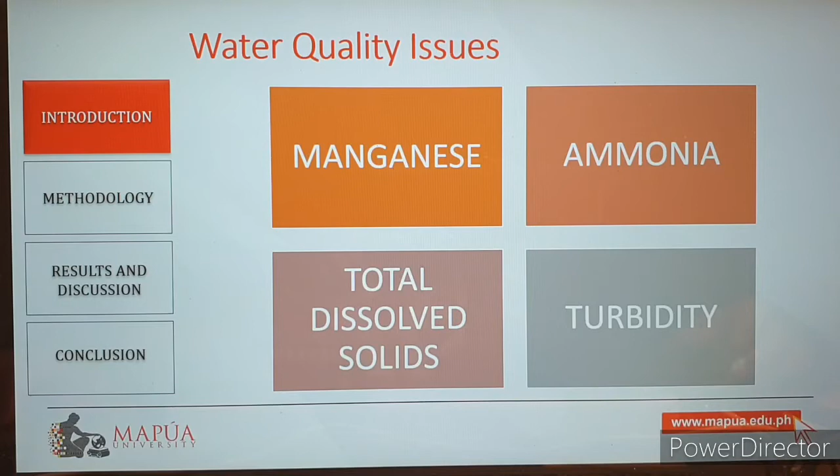The main pollutants in the lake are as follows: ammonia, manganese, total dissolved solids, and turbidity.

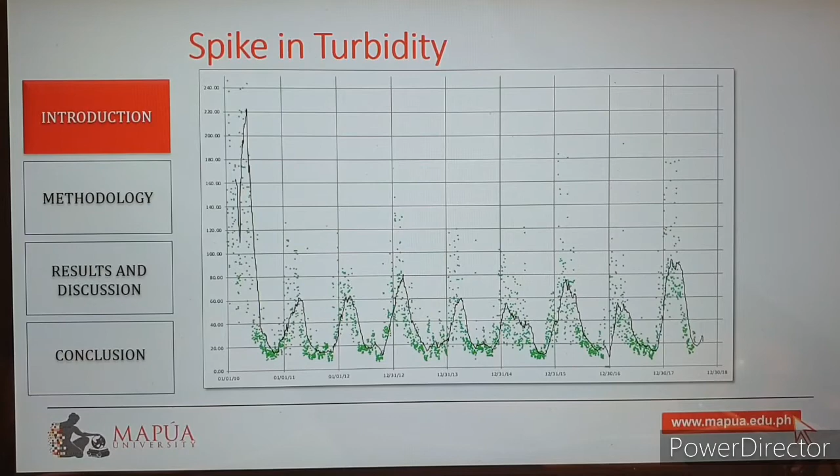The raw water from the source is subjected to rapid mixing, where coagulant is dosed. Coagulation process will start upon contact of the coagulant to the raw water. It will then pass through a tank where flocculant is added with slower mixing. Coagulated solids will form larger aggregates.

The raw water and the solids will enter the reaction zone where saturated air is dosed into the system, making the aggregate solids float. They are then separated from the water by scraping, and the sludge is collected for treatment and disposal. A portion of the treated water is recycled back to the saturation zone, where air bubbles are formed through high pressure in the saturation tank. This creates an air-water system that is used in the flotation of sludge in the reaction zone.

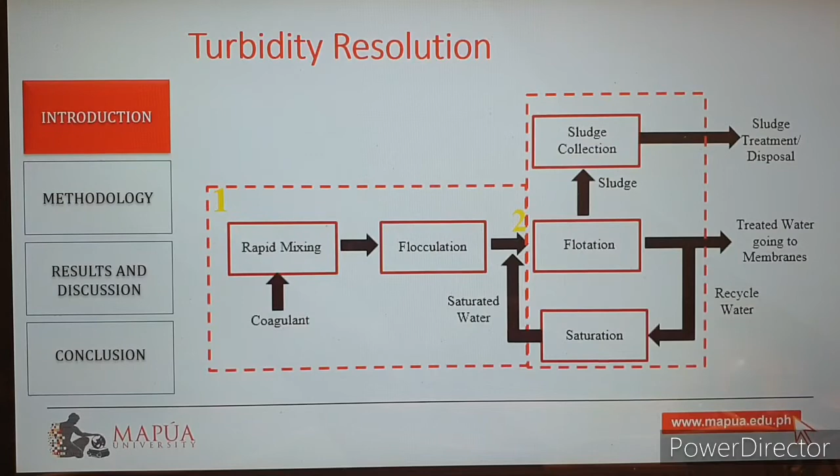Previous studies that determined the efficiency of DAF to treat high turbidity waters used pilot plants and experimental setups instead of full-scale plants. This has a significant difference, as actual setups tend to have significantly lower efficiency due to turbulence and higher flow rate.

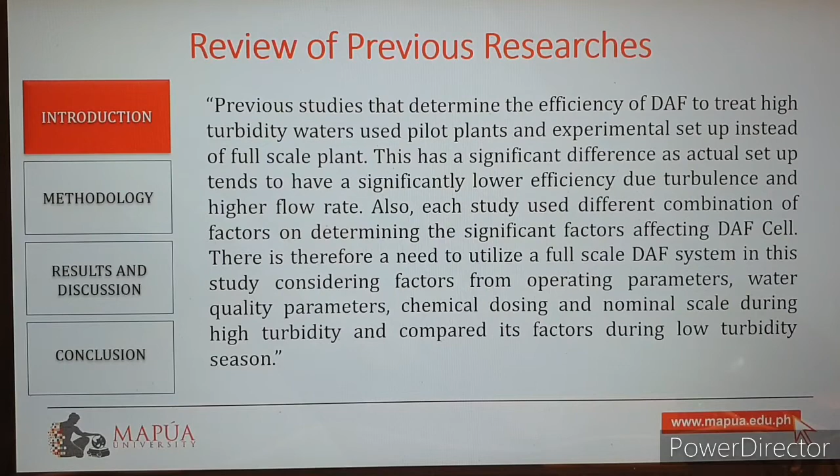Also, each study used a different combination of factors in determining the significant factors affecting DAF. There is therefore a need to utilize a full-scale DAF system in this study, considering factors from operating parameters, water quality parameters, chemical dosing and nominal scale, and to compare these factors during the low turbidity season.

The first objective of the study is to formulate an optimization model of the dissolved air flotation performance for different turbidity conditions. Second is to test the model on actual conditions to determine its effectiveness for different turbidity conditions.

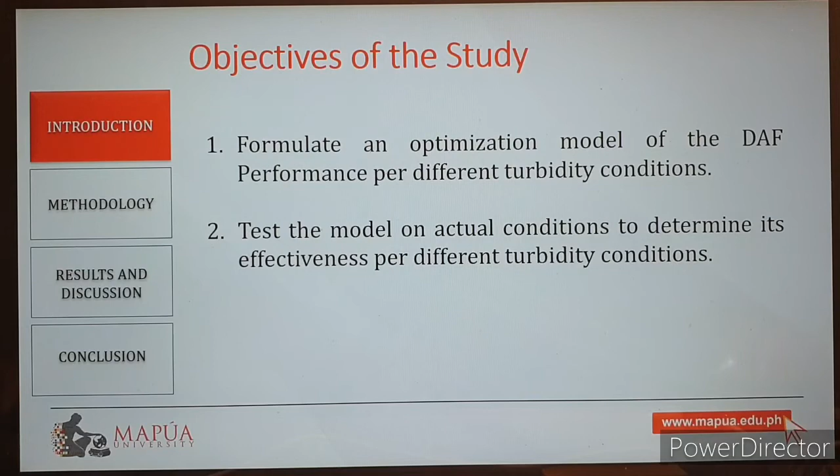For the significance of the study, it can be used as a benchmark for other water and wastewater treatment plants that use a dissolved air flotation system.

The study focused on the existing dissolved air flotation system of Putatan water treatment plant. The study was limited to the records and forms available from the plant, and was performed prior to and during the Amihan season, where turbidity values shot up.

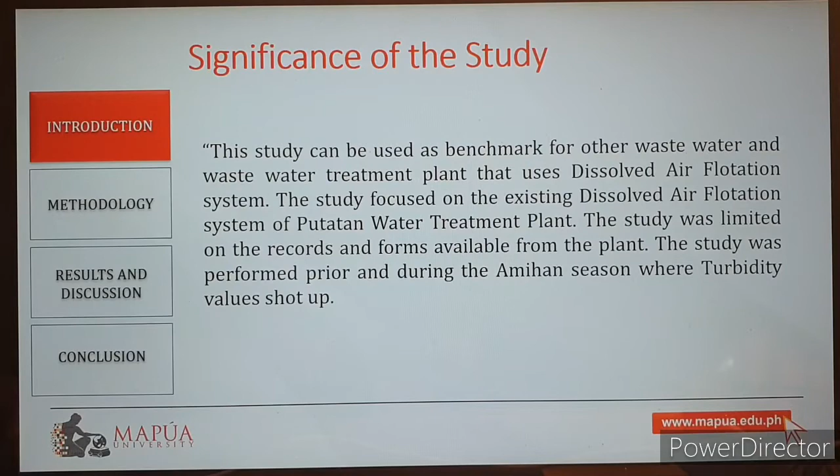In order to optimize a full-scale dissolved air flotation system, several items were prepared prior to the experimental runs. First, the scope of low and high turbidity was defined. Second, the factors that have a significant impact on dissolved air flotation at different turbidity levels were identified.

This was done by performing cluster analysis and multiple regressions on the historical data. Cluster analysis was used to group the historical data into different conditions of turbidity, high and low. It is a method of grouping objects that are very similar, not only in one, but in several variables.

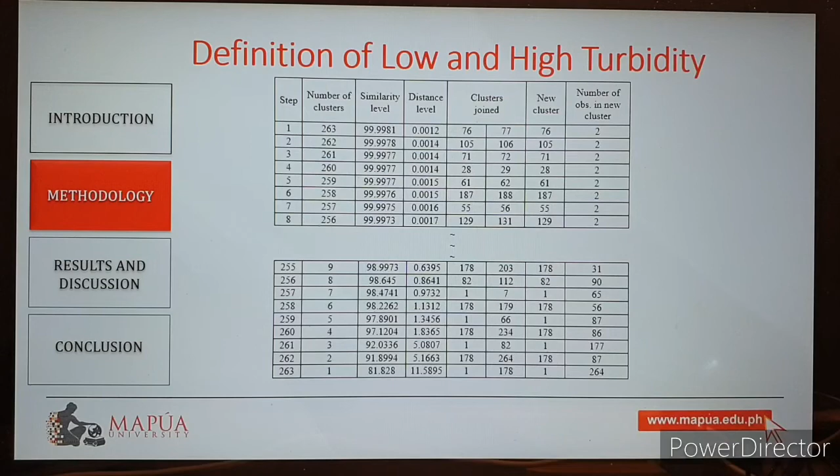Squared Euclidean distance was used as the distance matrix, and the method was complete linkage. The jump in similarity level from steps 262 to 263 was the biggest among the steps, at 10.071%, and therefore it was chosen as the number of clusters, which is two clusters.

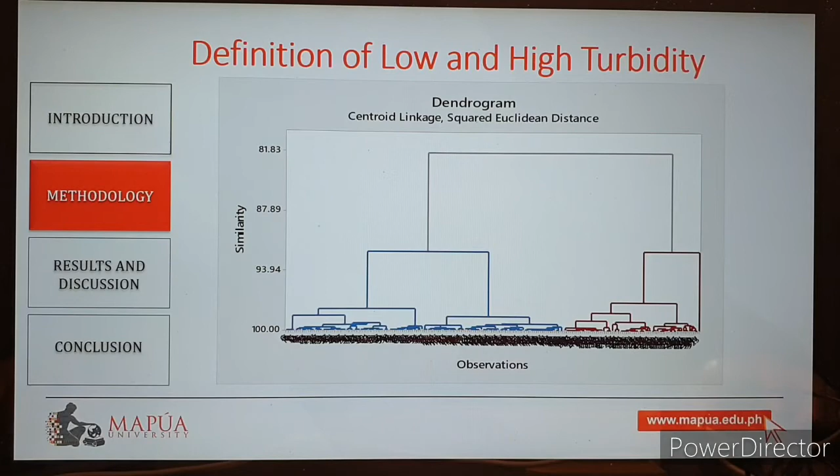There was no literature showing the distinct differences between low and high turbidity values. However, several literature suggested that around 200 NTU turbidity was already considered high. Therefore, the 181 NTU lower limit for the high turbidity cluster was accepted. This definition of low and high turbidity was used for the rest of the experiment.

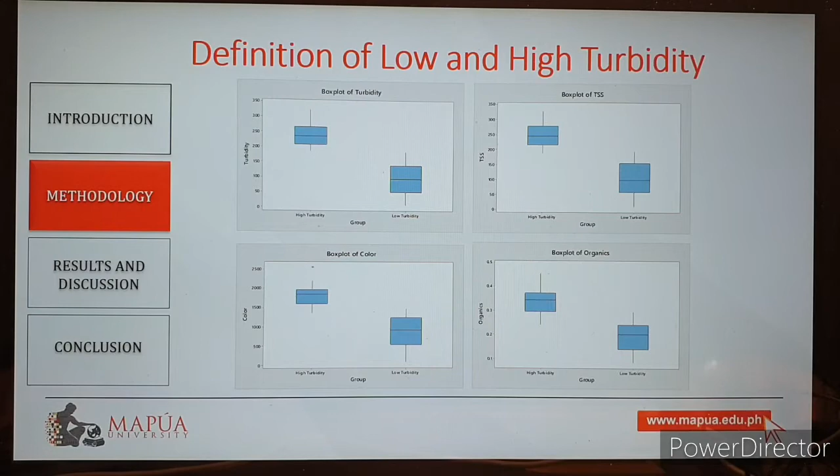Upon identification of the limits of turbidity level, multiple regression was performed for both clusters to determine the significant parameters. As mentioned in the previous chapter, previous studies showed that parameters used to optimize dissolved air flotation cells vary from study to study. Some use water quality and chemical dosing, like what Alshani et al. did using oil-water emulsion. Some focus on operating parameters of dissolved air flotation, such as what Rubio et al. mentioned. Others combined water quality, chemical dosing, and operating parameters, such as Maysami and Caselan, Edwards et al., Palaniandi et al., and Bickerton stated. To account for the effect of various factors, inlet water quality factors, chemical dosing factors, and dissolved air flotation operating parameter factors were included in a multiple regression.

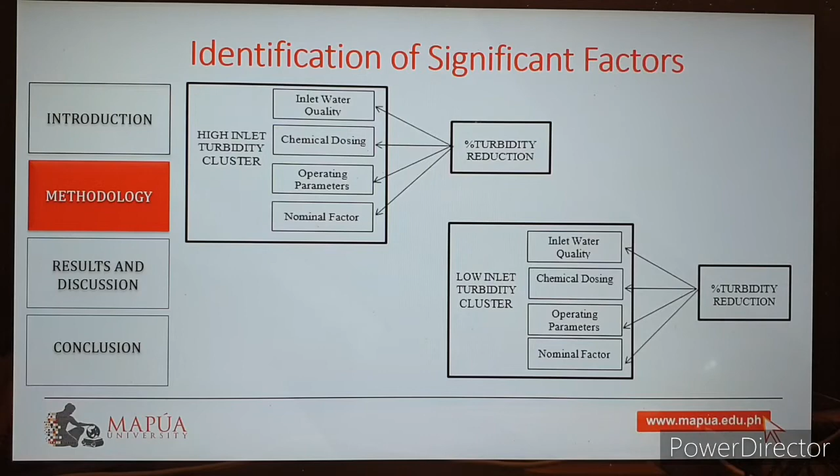To account for the difference in human behavior during morning shift and night shift, a nominal factor, which was time per shift, was added in the regression.

Aside from turbidity, there are 11 inlet water quality parameters included. First is the oxidation reduction potential, the potential that an oxidation and reduction reaction occurs. The level of oxidation reduction potential will define what form of chemicals exist in the raw water.

Second is the total dissolved solid. It's a measure of the dissolved combined content of all substances present in the water that are smaller than 0.45 microns in molecular or ionic form.

Third, salinity, a measure of the amount of salts present in the raw water. Fourth, conductivity, the ability of the raw water to conduct an electrical current with the dissolved ions as the conductors. Fifth, in contrast with total dissolved solids, this is the measure of the solids present in the water that cannot pass through the 0.45 microns.

Sixth, ammonia, usually in the form of ammonia nitrogen, exists in water via natural liquefaction, domestic and industrial effluents, and sludge discharge. It produces taste and color issues in the water and reduces dissolved oxygen in the aquatic system.

Seventh, manganese also exists in water via natural liquefaction, domestic and industrial effluents, and sludge discharge. It produces discoloration, metallic taste, and odor in the product water, and clogging in pipes.

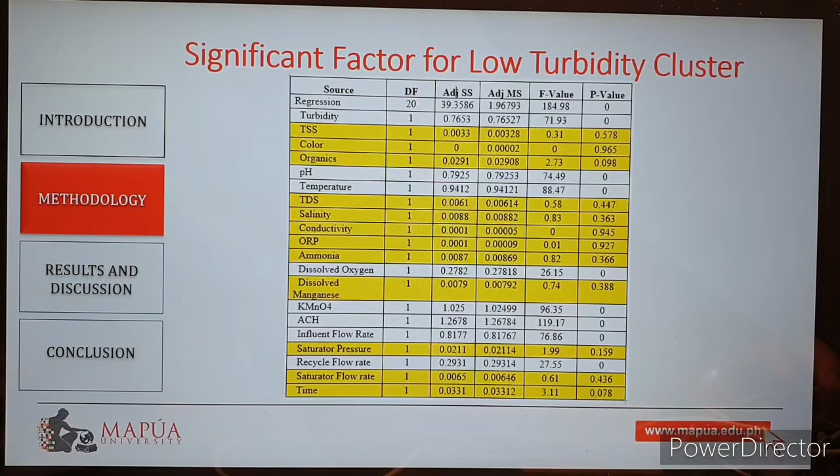After removing these parameters, the second multiple regression was executed. The ANOVA is as follows. From table 3, all the parameters were shown to have p-values lower than 0.05. Therefore, for the factorial experiment on the low turbidity cluster, 8 parameters were used: turbidity, influent flow rate, pH, temperature, dissolved oxygen, potassium permanganate dosing, ACH dosing, and recycled flow rate.

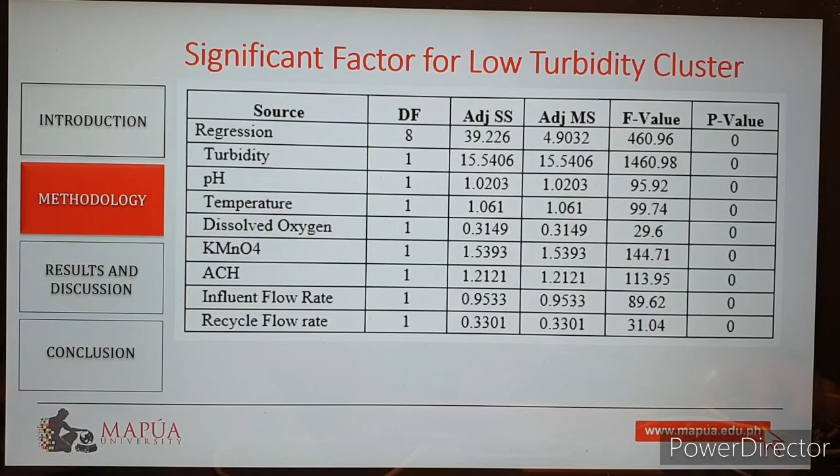For the high turbidity cluster, below is the ANOVA from the initial run. From table 4, the p-value for turbidity is equal to 0.661. TSS is equal to 0.988. Color p-value is 0.756. Organics p-value is 0.992. pH p-value is 0.136. Temperature p-value is 0.244. Salinity p-value is 0.584. Conductivity p-value is 0.61. ORP p-value is 0.499. Ammonia p-value is 0.598. Dissolved oxygen is 0.354, potassium permanganate is 0.338, ACH is 0.937, saturator pressure is 0.439, and recycled flow rate is 0.863. Saturator flow rate is 0.295, and time is 0.367 were all larger than 0.05.

This means that their effects had no significant effect on percent turbidity reduction. These variables will therefore be removed in running the design of experiment.

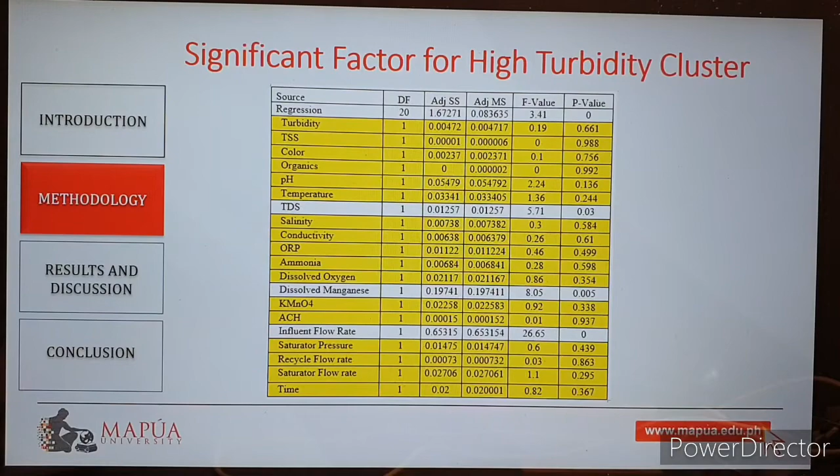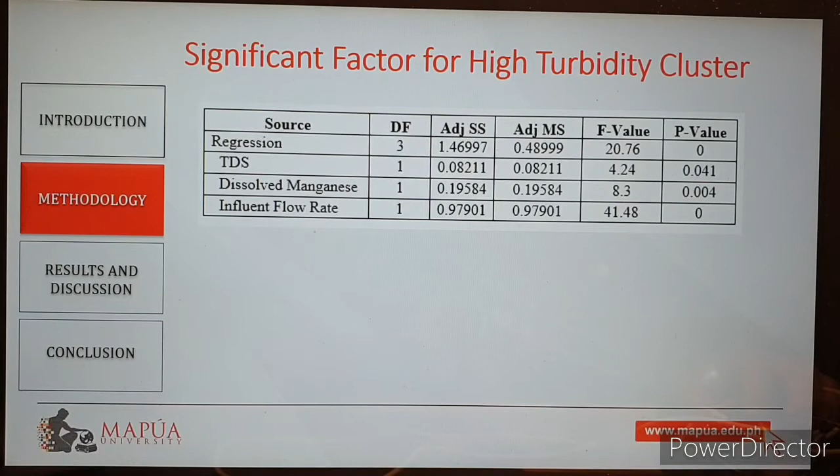Upon removing these parameters, another round of regression was performed. The ANOVA is as follows. ANOVA table for the stepwise multiple regression of the turbidity cluster. From table 5, all of the parameters are shown to have p-values lower than 0.05. Therefore, for the factorial experiment on the high turbidity cluster, 3 parameters were used: total dissolved solid, dissolved manganese, and influent flow rate.

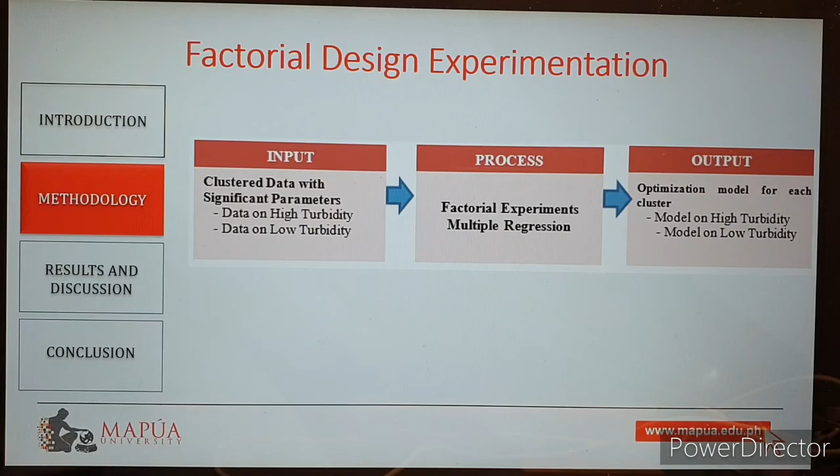Upon establishing the factors that will be used for optimization for both clusters, the objective of this paper can now be achieved by performing factorial design experimentation on each cluster and by verifying the accuracy of the model.

For the low turbidity cluster with 8 factors, a fractional factorial design is used with 1 replicate for each treatment. First, there is only limited time for the runs, and second, there are some factors that are not controlled but we have to wait for them to happen, like inlet water quality parameters. Resolution IV was chosen, 1 out of 8 fraction with 32 runs.

The values of the factors are shown based on the lowest and the highest recorded values of each of the factors in the low turbidity cluster. The experiment was performed from December 1, 2018 to January 3, 2019. The experiment was done in the actual DAF cell, and measurements were done in the lab for the water quality, and checking the flow meter for the flow rates. The results were encoded in Minitab for multiple regression.

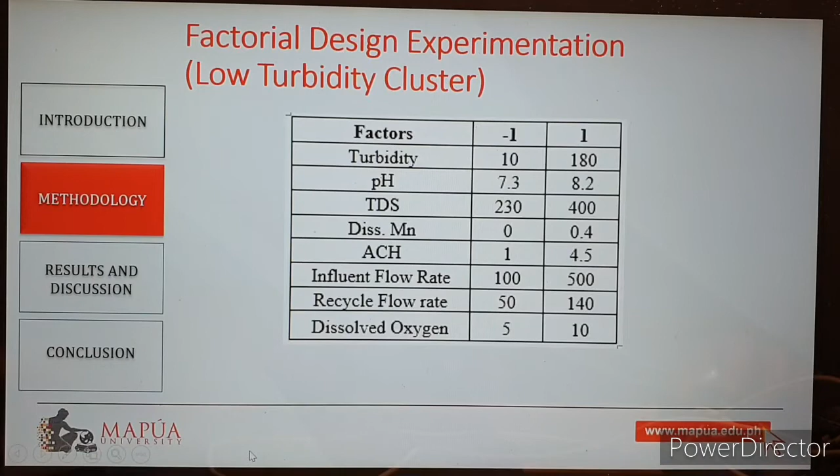For the high turbidity cluster with three factors, a full factorial design was used with one replicate for each treatment, as there is only limited time for the runs. There are some factors that are not controlled, but we have to wait for them to happen. It was chosen with 8 runs. The experiment was performed from December 1, 2018 to January 1, 2019. The experiment was done in the actual DAF cell, and measurements were done in the lab for the water quality and checking the flow meter for the flow rates. The results were then included in Minitab for multiple regression.

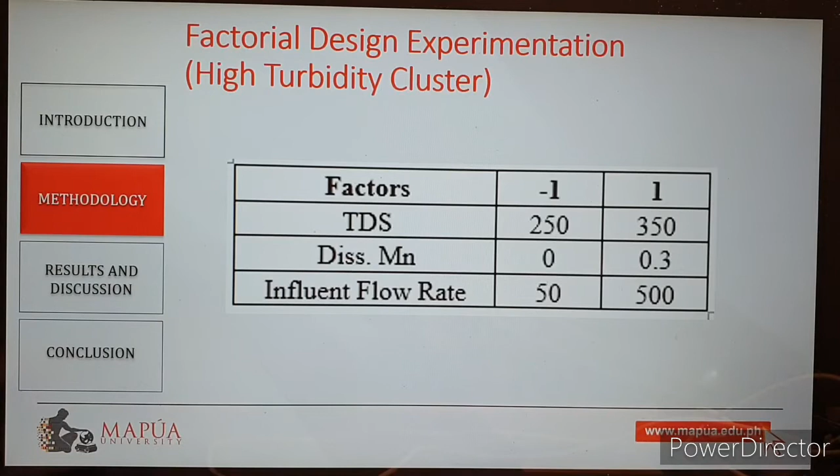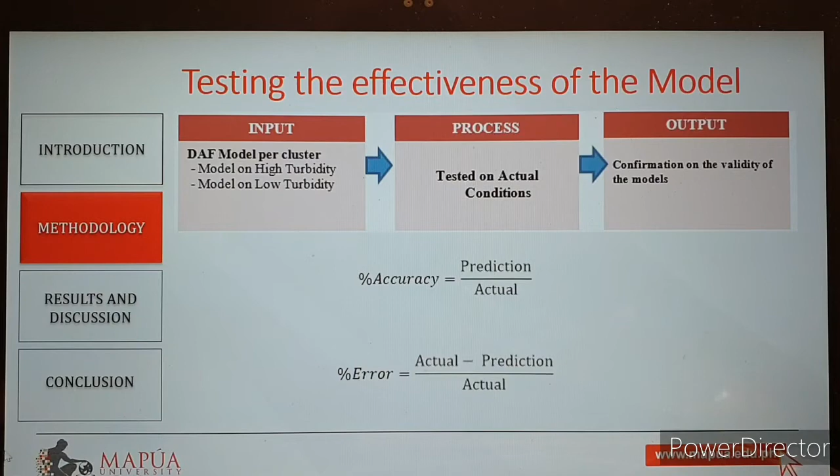It was apparent that 11 factors, including interactions, had significant effect on the percent turbidity reduction of the low turbidity cluster.

The factors considered include ACH influent flow rate, total dissolved solids, dissolved oxygen, turbidity, pH, recycle flow rate, dissolved manganese, and their interactions such as ACH and dissolved oxygen, and dissolved oxygen and turbidity.

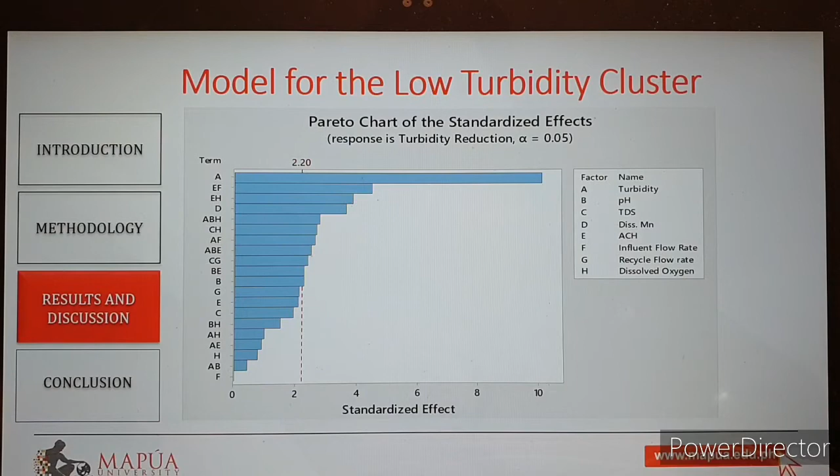For a confidence level of 95%, 11 factors were significant. Here is the ANOVA table calculated from the experiment. The items highlighted in yellow were the factors that have p-value greater than 0.05, meaning that at 95% confidence level, they had no significant effect on the percent turbidity reduction at the low turbidity cluster. It must be noted, however, that since the model was hierarchical, the values must be retained.

The top four factors, turbidity at 46.08%, ACH influent flow rate at 9.08%, ACH-dissolved oxygen interaction at 6.71%, and dissolved manganese at 5.98%, constitute 68.09% contribution to the percent turbidity reduction. At low turbidity, percent turbidity reduction was more sensitive to changes in turbidity.

Given the equation of turbidity reduction, and since the final turbidity was the same, increasing the initial turbidity would increase the total percent turbidity reduction.

The relationship of ACH and influent with regards to turbidity reduction reflects the effectiveness of coagulation through rapid mixing. ACH was injected into the influent, and coagulation was induced through the high flow rate of the influent. A good combination of flow and chemical dosing would lead to improvement in turbidity reduction.

The relationship of ACH and dissolved oxygen with regards to turbidity reduction reflects the effectiveness of coagulation and aeration. High dissolved oxygen in the system would mean that the coagulated particles can be easily floated in the tank.

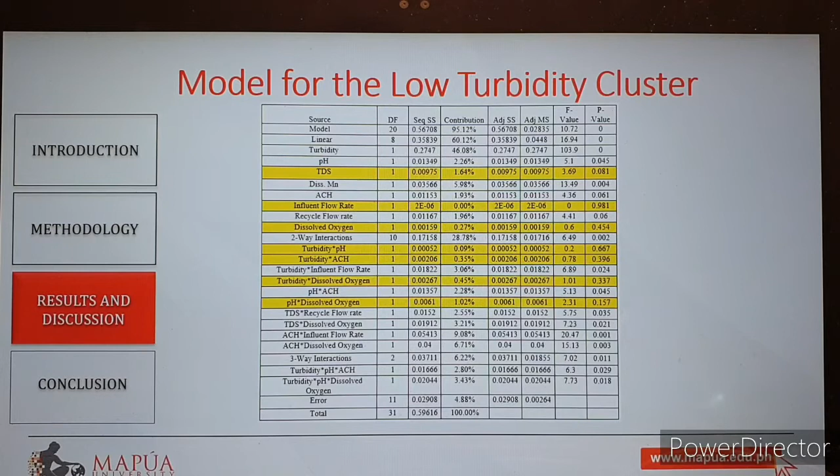The effect of dissolved manganese with regards to turbidity reduction was on the formation of manganese dioxide. High dissolved manganese results in color and adds to the turbidity of the system.

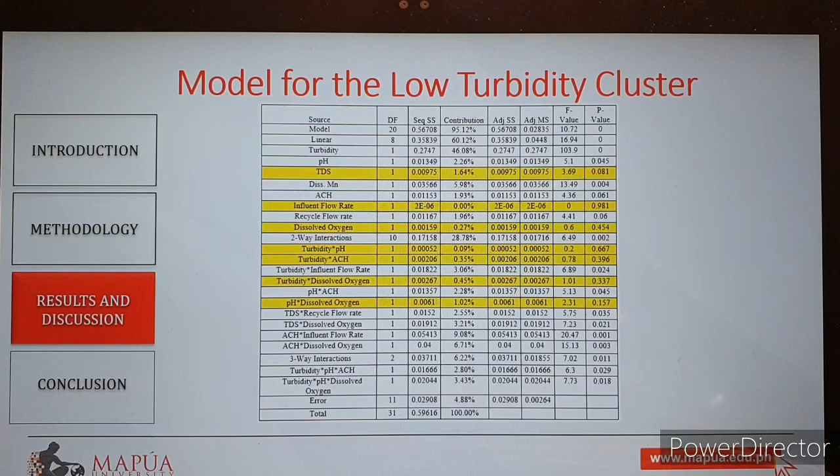Based on the results of the coefficients in the table above, R squared equals 95.12%, which means there are smaller differences between the observed data and the fitted values.

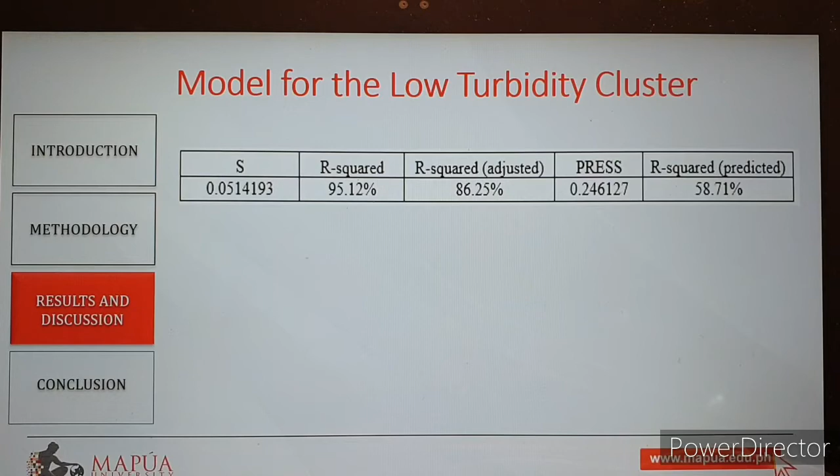The regression model for the low turbidity cluster is shown in this slide.

This figure shows the response optimization of all the factors in order to get the planned target, which is 80% turbidity reduction. The inlet turbidity should be 10 NTU, pH should be 8.2, total dissolved solids should be 400 ppm, and dissolved manganese dosing should be 0.

ACH should be 1, influent flow is at 497.17 liters per second, recycled flow rate is at 50.01 liters per second, and dissolved oxygen should be 8.88 ppm. This will give us a percent turbidity reduction of 80%.

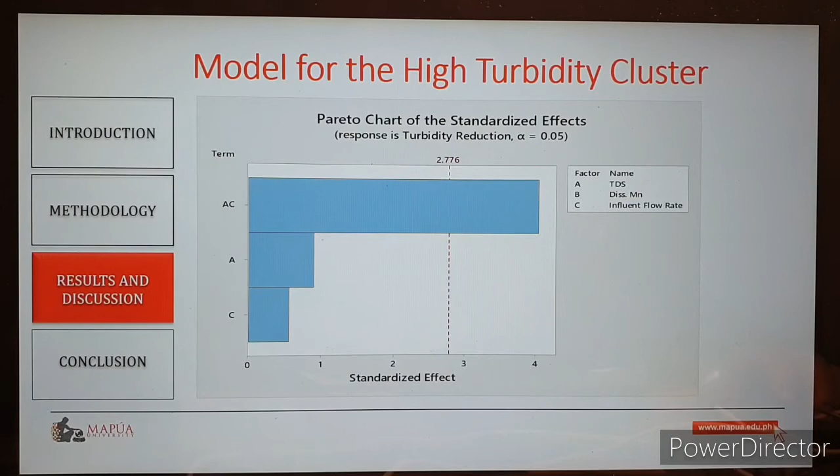Only total dissolved solids and influent flow rate are shown in the graph because the effect of dissolved manganese is omitted, as the effect is insignificant, as well as its interaction to percent turbidity reduction.

As can be seen, almost all factors except for the interaction of TDS and influent flow rate show an insignificant effect on percent turbidity reduction. It must be noted, however, that since the model is hierarchical, the TDS and influent flow rate must be retained. On the other hand, we can remove the dissolved manganese factor as well as its interaction.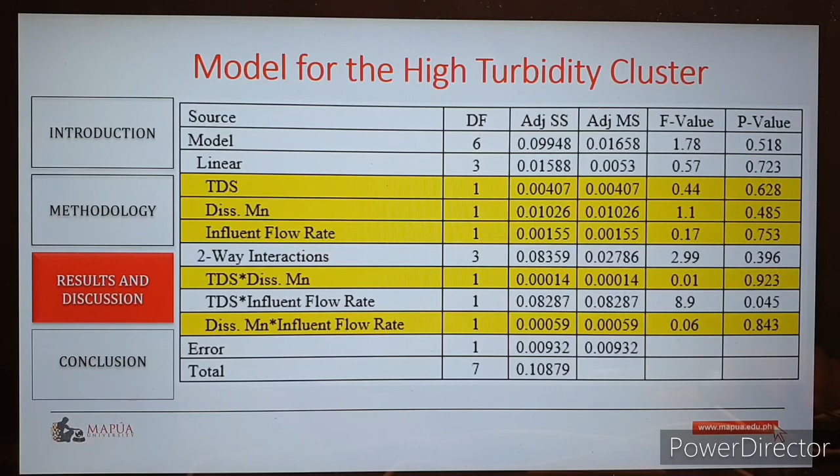Another run for ANOVA was performed without the dissolved manganese, and this is the result. The table shows that TDS and influent flow rate still have no significant effect, but due to their interaction, they are still retained in the model.

At high turbidity, only a handful of parameters have an effect on turbidity reduction, as the capacity of dissolved air flotation is already reached. The saturators are clogged, and the air could not push the solids upward, which caused the sludge to sink on the floor.

The only parameter in the experiment that showed a significant effect is the joint interaction of TDS and influent flow rate. The combination of TDS and influent flow rate accounts for the rate of dosing ionic salts in DAF.

At high turbidity, the air to solids ratio is very much affected because during these conditions, the denominator is much higher than the numerator, and the presence of TDS has a significant effect on the solubility of air in the water. This results in a much lower air to solids ratio and lower percent turbidity reduction.

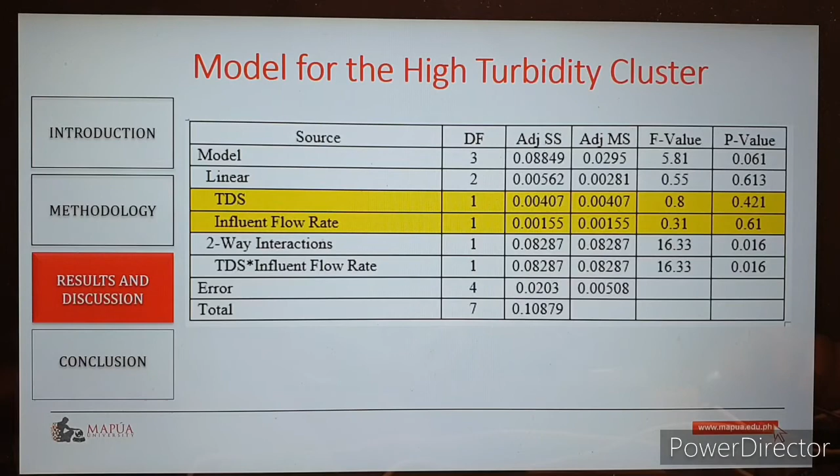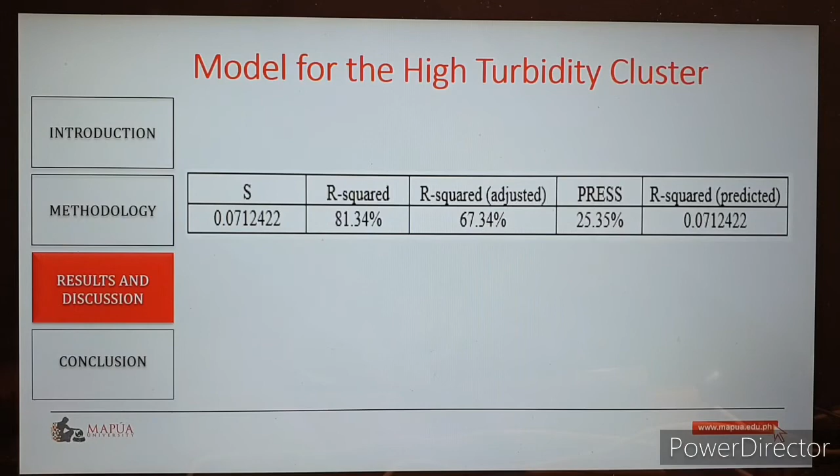Based on the results of the coefficients of the table above, R squared is equal to 81.34%, which means that there are smaller differences between the observed data and the fitted values. This is the regression model for the high turbidity cluster.

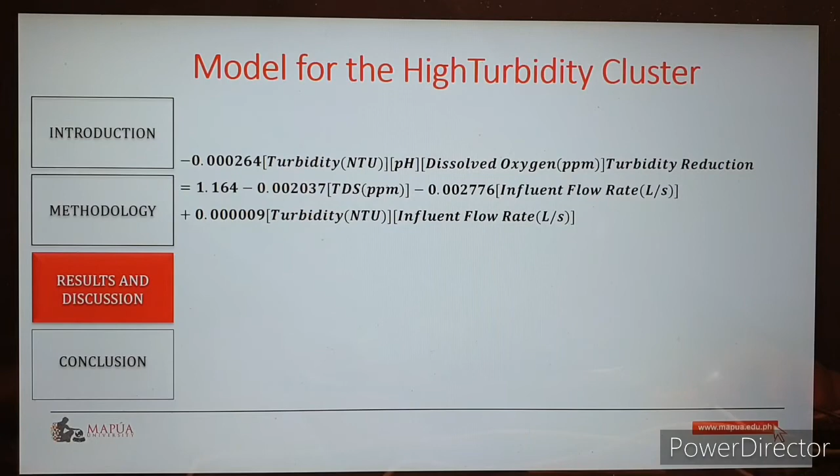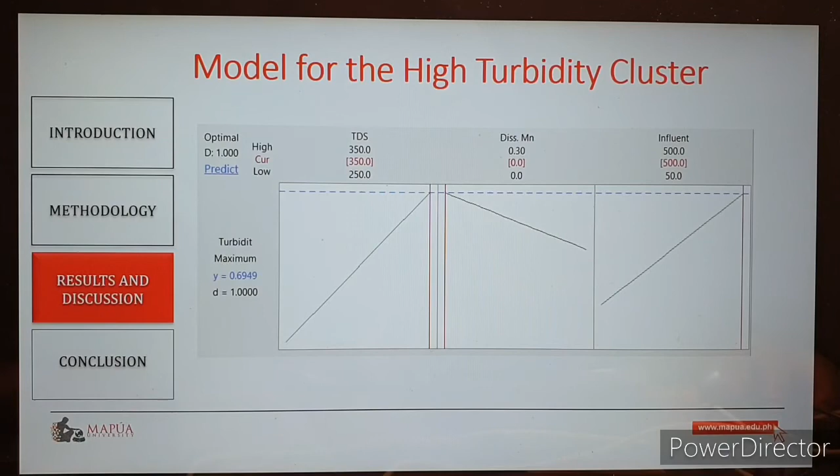The model shows high accuracy in predicting the actual values with percent difference ranging from 0.42% to 14.12%, with an average of 7.4% for 70 samples. Accuracy ranges from 85.88% to 99.58% with an average of 92.6%.

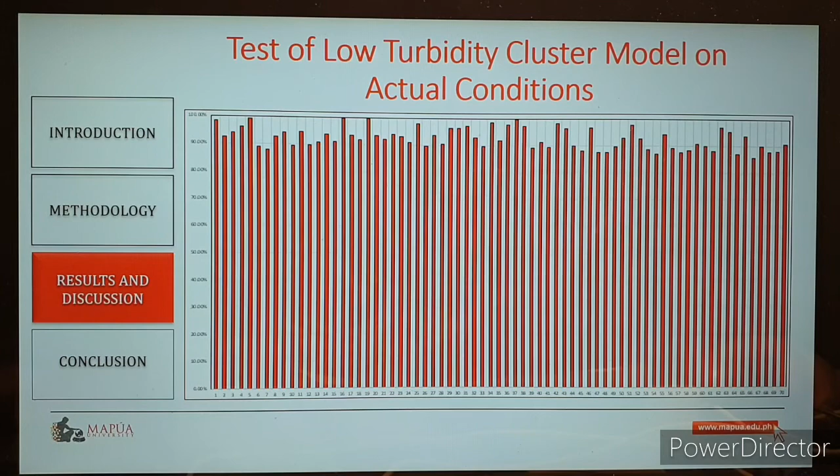For the high turbidity cluster, only 8 samples were tested as the Habagat season was already finished and turbidity values entering the plant fall mostly on the low turbidity cluster.

The model shows high accuracy in predicting the actual values with percent difference ranging from 7.78% to 16.77%, with an average of 11.88% for 8 samples. Accuracy ranges from 83.23% to 92.22%, with an average of 88.12%.

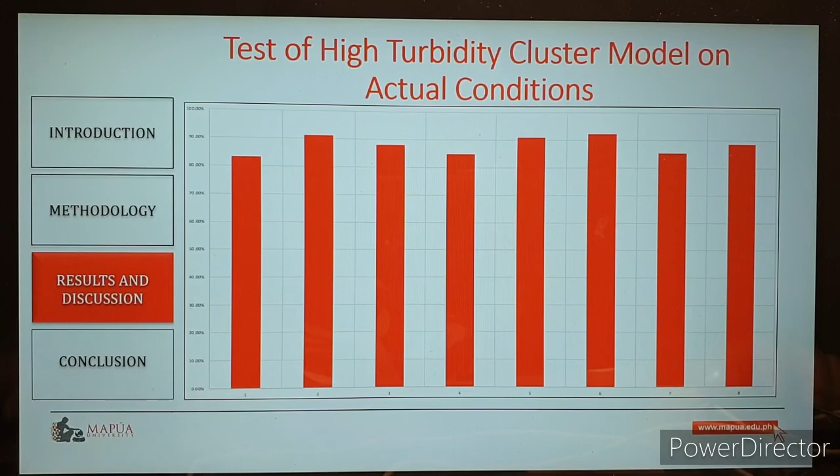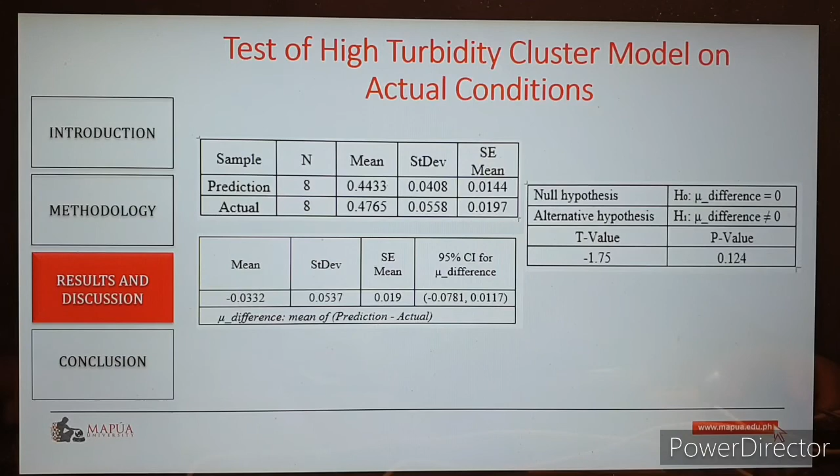The study confirms the difference in the efficiency of dissolved air flotation system at different turbidity levels using cluster analysis. Water quality data from June 2017 to November 2018 was separated into two groups: low turbidity cluster containing influent with turbidity values ranging from 0 to 181 NTU, and the high turbidity cluster containing influent with turbidity values ranging from 182 to 323 NTU. Result of the t-test showed that the following parameters have a significant difference, with p-value less than 0.05 between clusters: turbidity, TSS, color, organics, temperature, and ammonia.

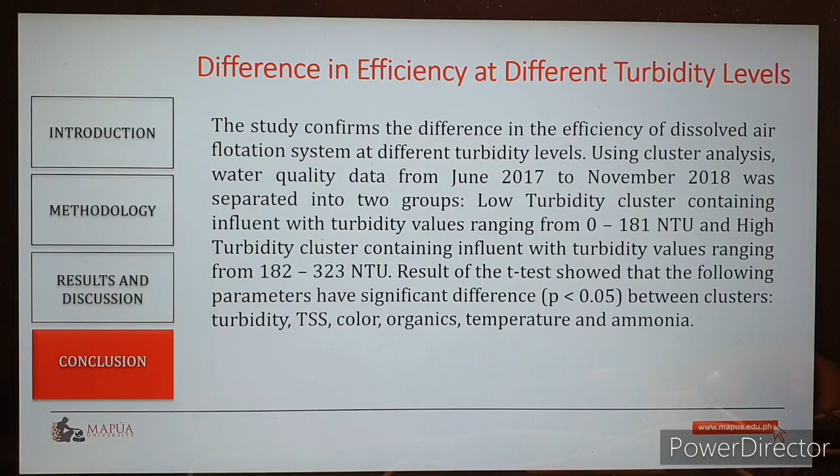For the low turbidity cluster, 5 main factors, 6 two-way interactions, and 2 three-way interactions show significant effect in the percent turbidity reduction. The regression model generated an R squared equal to 95.12%. The residual plots support the validity of the model.

From the model, the ideal setting, which is percent turbidity reduction greater than 80%, was calculated: turbidity equals 10 NTU, pH 8.2, TDS at 400 ppm, dissolved manganese is 0, ACH dosing is 1 ppm, influent flow is 497.17 liters per second, recycled flow rate is at 50.01 liters per second, and dissolved oxygen is 8.88 ppm.

For the high turbidity cluster, only one two-way interaction shows significant effect in the percent turbidity reduction. The regression model generated an R squared equal to 81.34%. The residual plots support the validity of the model.

So from the model, the ideal setting, which is percent turbidity reduction greater than 80%, was calculated when TDS equals 350 ppm, dissolved manganese is 0 ppm, and influent flow rate is at 500 liters per second. This was already the maximum setting. However, the maximum percent turbidity reduction that was reached was 69.4%.

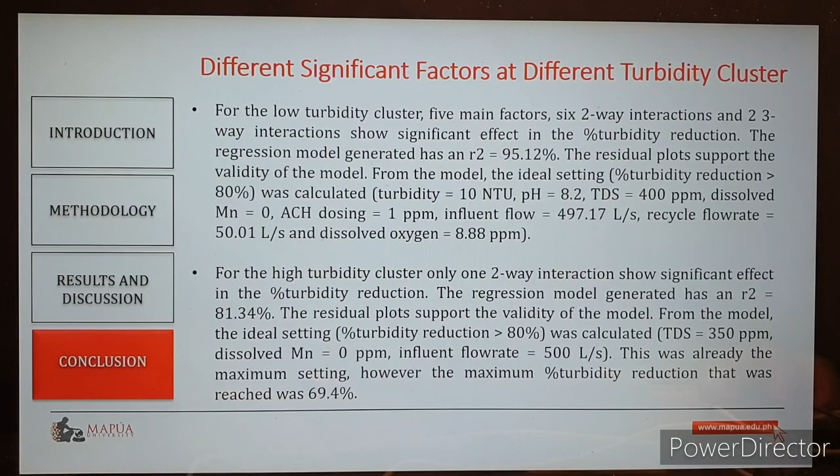For the low turbidity cluster, 70 samples were gathered. Data showed that there was 92.6% accuracy on the predictions. A paired t-test proved that the means of the prediction and the actual were not significantly different.

For the high turbidity cluster, only 8 samples were gathered due to the low turbidity entering the plant. Data showed that there was 88.12% accuracy on the predictions. A paired t-test proved that the means of the prediction and the actual were not significantly different. Thank you.